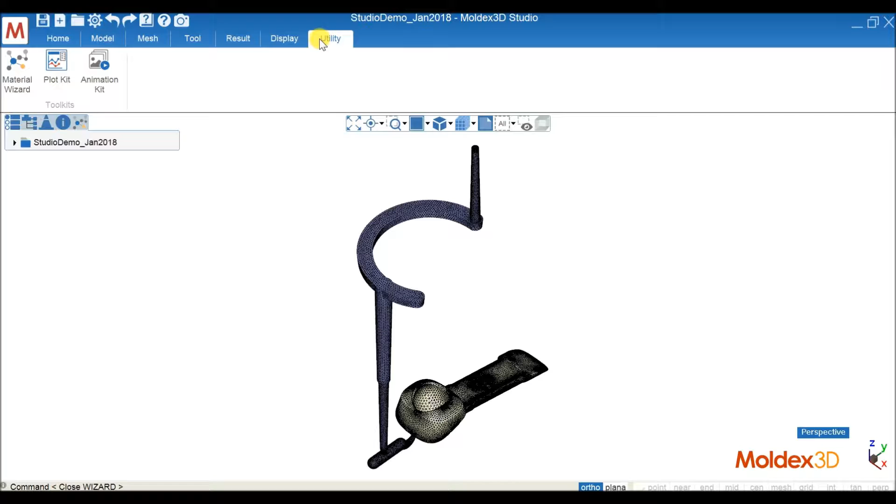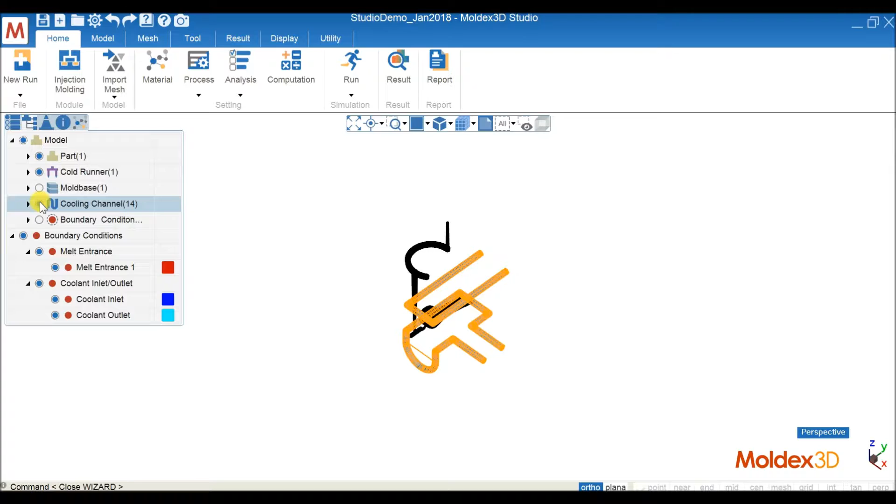So basically on the top, that's the ribbon menu, and on this side we have a tree-style structure. This is the project tree, and here we have a model tree. As you can see, that is very convenient for users to show or hide certain objects - for example, if I want to show the mold base, the cooling channel, or hide it, it's very easy to control in this model tree.

And then we also have the defect tree, so we can see the surface mesh defects or solid mesh defects remain for the mesh. Besides the defect tree, we also have a run information list.

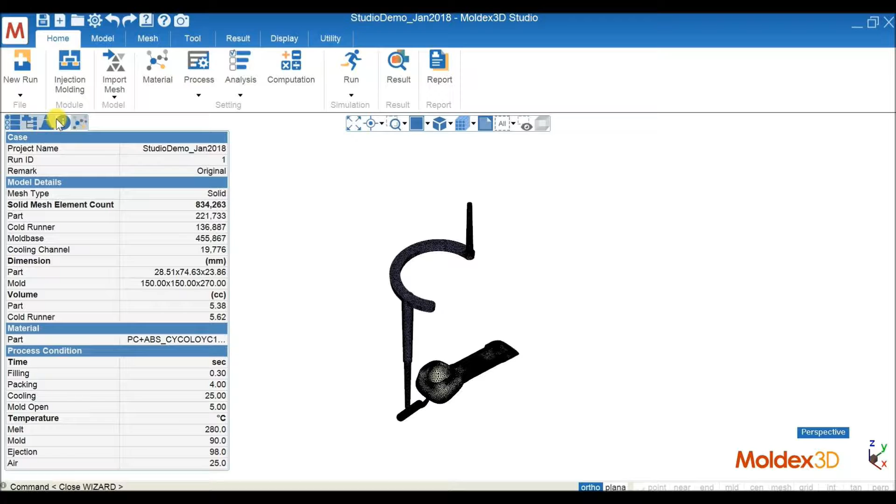This is new in Studio - we have the run information list, so users can check again the model details, the material, or the process condition. And the last in the model tree, we have the geometry and also the material which belongs to it.

So yeah, this is the interface for this R16 Studio. And for the operation, we also have new tools here.

As you can see, we have some tools like edit remarks, so in case you want to give a certain name for a certain run - for example here we have original, revision 1, and revision 2, something like that - that belongs to edit remark.

We also have export runs, so for example, in case you want to export run 1 to a new project, you can freely do that, and you can give a specific name for that one too. So for edit remark, export is very convenient.

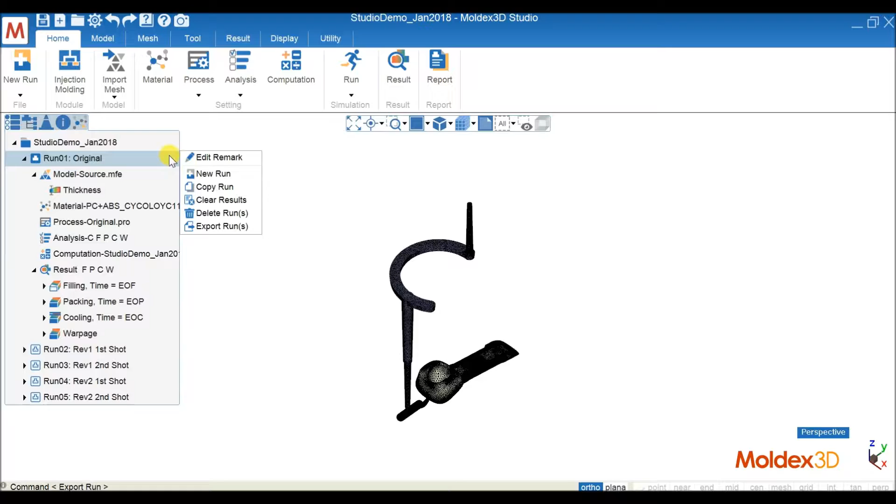Inside we also have copy run, or clear results, or also delete runs. For copy run, for example, we can copy input data only, or maybe full run data in case you already have the results, and also maybe you can customize which results you want to copy.

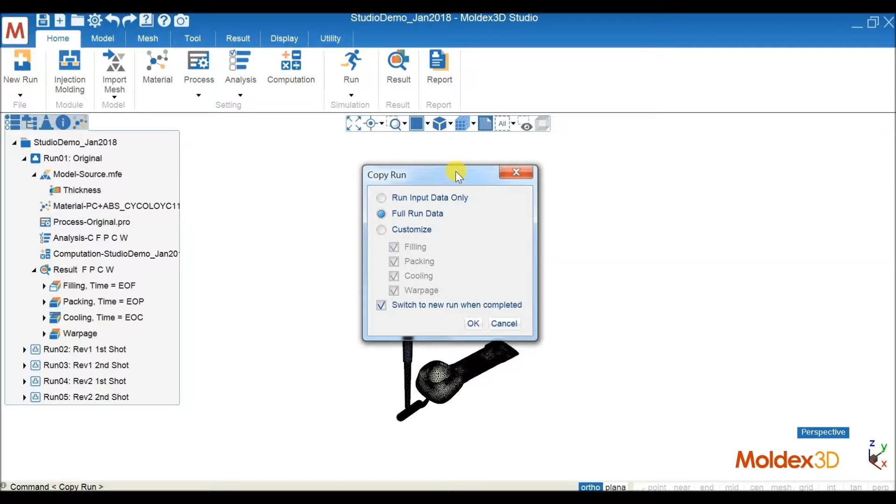This gives benefits for users in case they want to copy several runs but only change certain inputs, while the rest are kept the same - convenient for users to do the operation. So input data, full run data, customize - users can pick anything they want.

The next section is about MCM analysis. We know that in regular injection molding, one of the common cases is about MCM, multi-component molding, so we have a part or part insert, something like that.

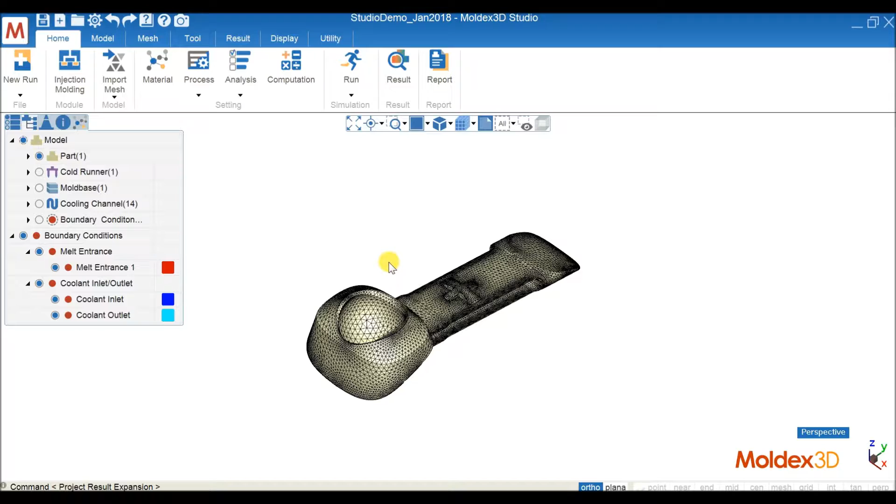Like I introduced before, we have the problem about the ball socket - we have a sink mark because of its thickness. In the studio, we can also display the thickness distribution like this, and as you can see, most of the thickest region will be on the ball socket, which will induce the sink mark problem.

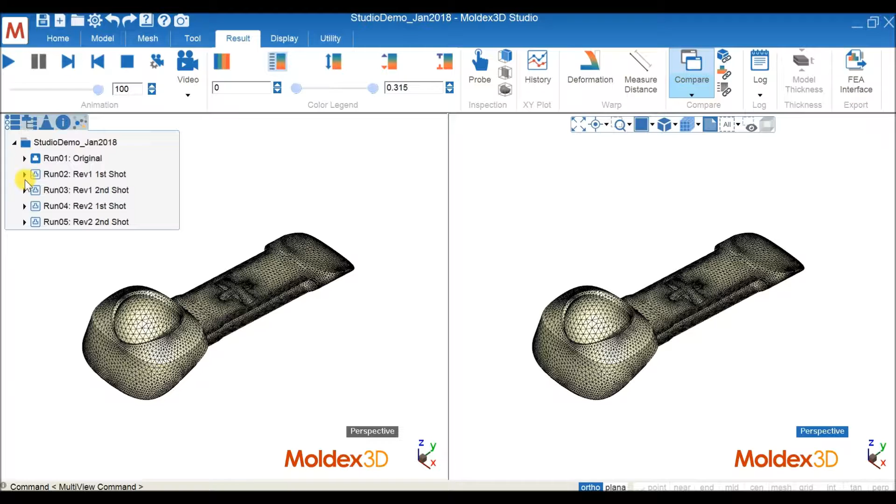So that's why we will try to do a 2K injection molding for this case. And I would like to compare using our studio interface, side by side on the left and right. This is also a special feature in the studio that you can compare two different runs side by side, in one platform. So users will find it very convenient to control and show everything in one platform.

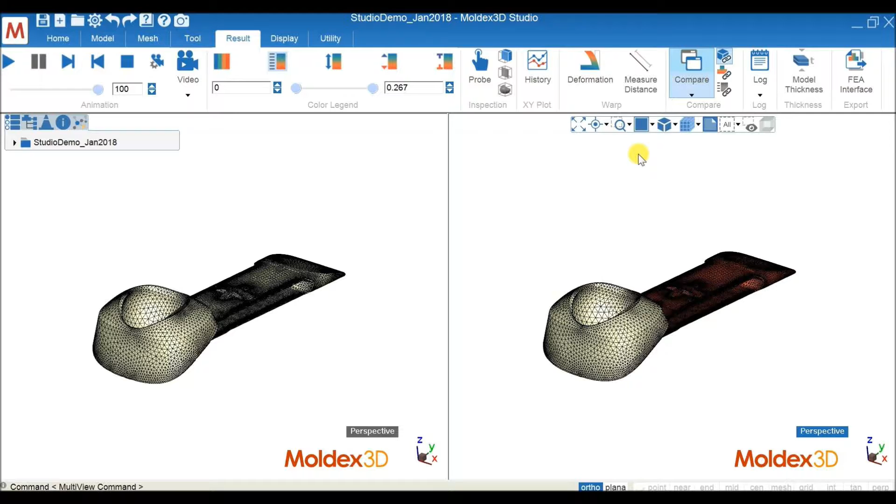So here on the left and right side, you can see that is a 2K injection molding. We try to have the first shot on the beam and the second shot on the ball socket. So our studio can now support this 2K injection molding, or MCM technology.

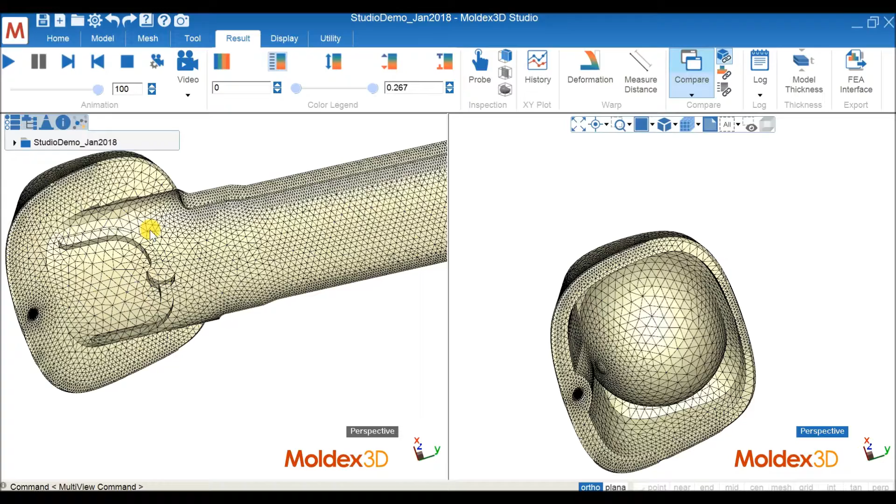I also would like to show why we need to change to the 2K injection molding, because now the thickness for the ball socket will be reduced by using this kind of technology. So this will help the designer solve their sink mark problem.

We can hide and show the part insert in the model tree. And also we can check the material. So basically users can set the material for the part and the material for the part insert very conveniently from our UI.

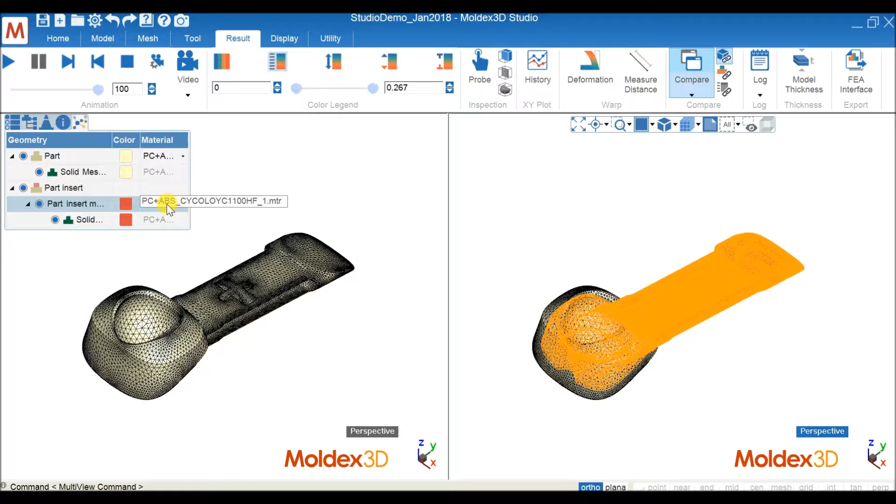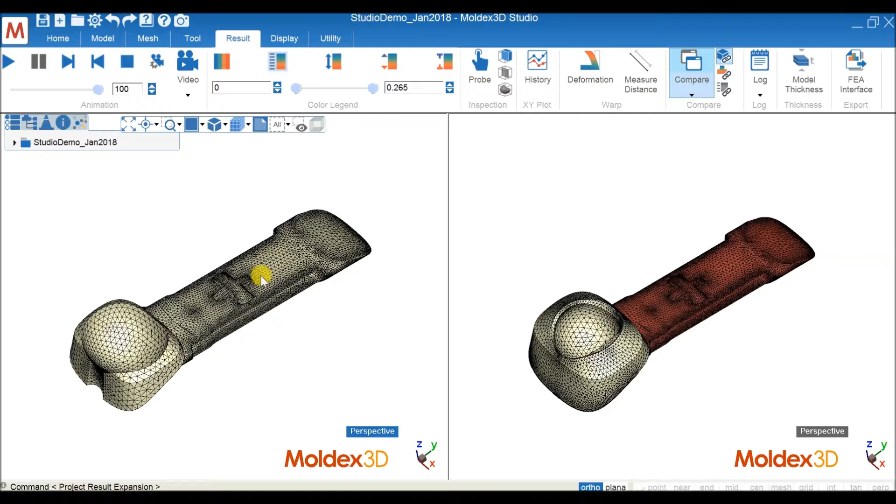On the left side, I try to show you, for example, I want to open run 2, which is the first shot for revision 1, so you can get a feeling of what this 2K injection molding looks like. On the left side, as you can see, that is the first shot, the beam. And on the right side is the second shot, the ball socket.

So this is our MCM analysis for the studio. The special setting that we usually have in our MCM analysis is in the computation parameters, where we have an MCM tab. In here, as you can see, we have what we call link with the previous shot.

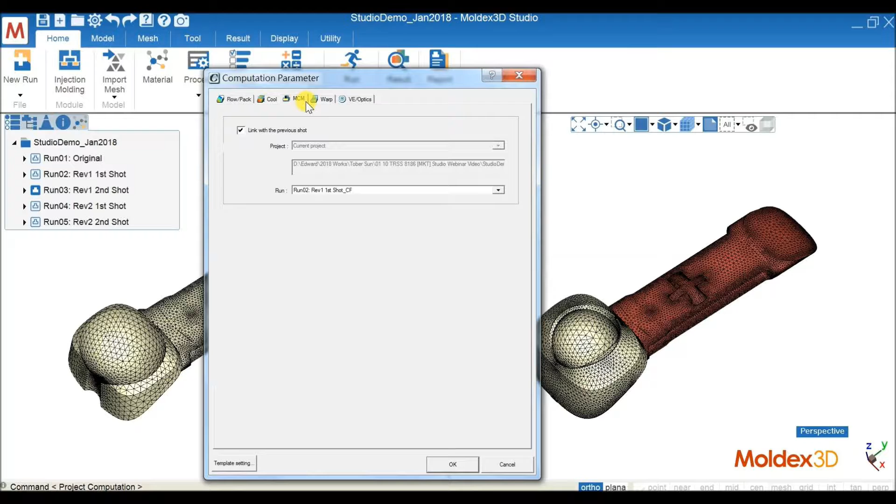This means your second shot will have a link with the first shot, so it carries the temperature result from the first shot. This will influence the result for our second shot, for example in the overmolding case.

And the last section for the demonstration video is about result inspection. So we will see several new things in R16 Studio that we can use.

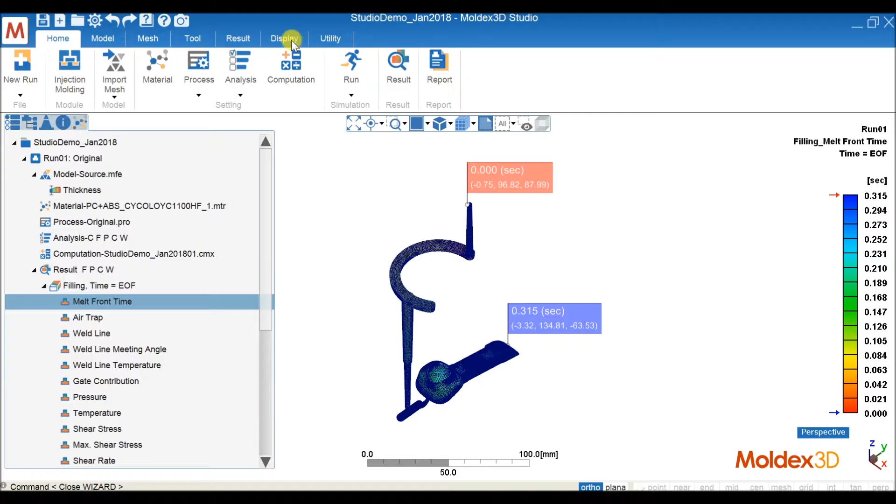The first one is display maximum and minimum. When you select a particular result, like melt front time in this UI, you can check the maximum and minimum value shown. If you turn off a run or something like that, this maximum and minimum value will automatically update itself, so it's very convenient for users. In case they want to hide it, users can also hide it in the display setting. So that's our new feature, display maximum and minimum.

The next thing is, for example with temperature, if we want to check the maximum, the red color, the highest temperature, we can use the clip and also see the distribution, what the temperature distribution is for this case.

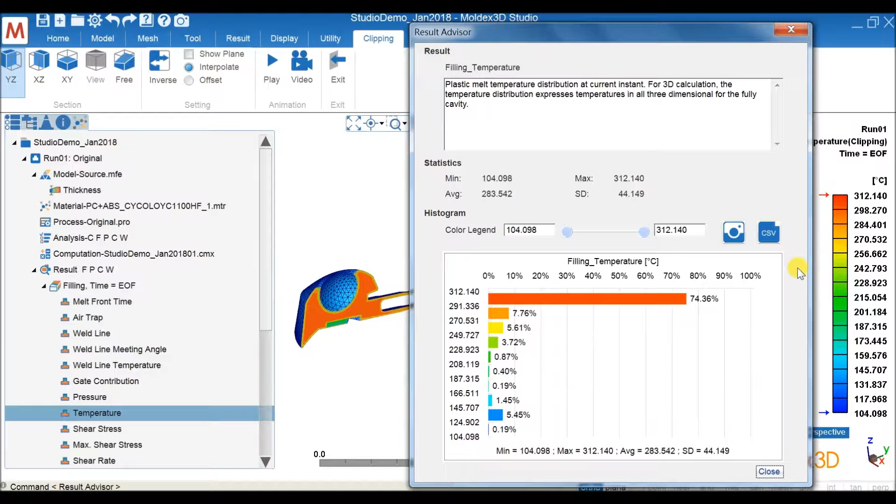We have a new feature now in R16, we call it result advisor. Users can double click on the result and it will show the statistic or distribution of the temperature. It's very convenient to use the studio to check or investigate the result.

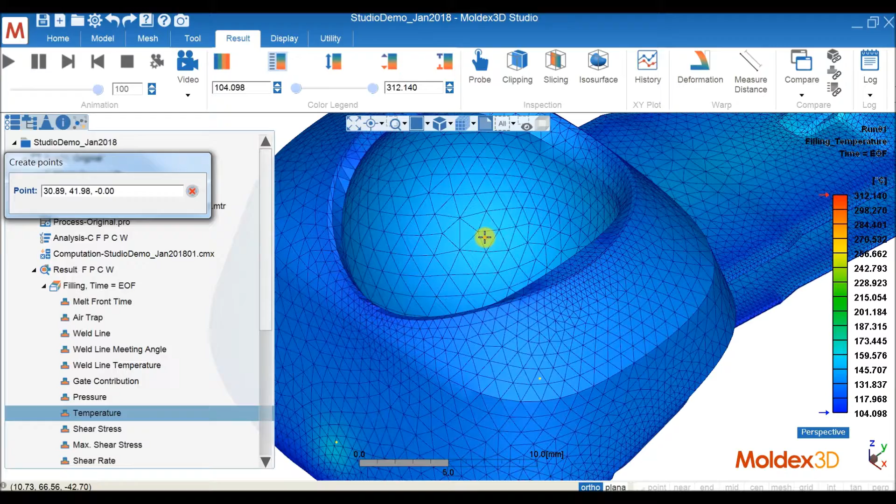The third new thing in result inspection is a tool we call probe. If you notice, in the project we have what we call the measure node, but in R16 Studio we have probe. As you can see, we can place the probe anywhere—it doesn't necessarily need to be at the mesh point or mesh node, it can be outside of it. Even when I pick it outside the mesh node, we can still check the result.

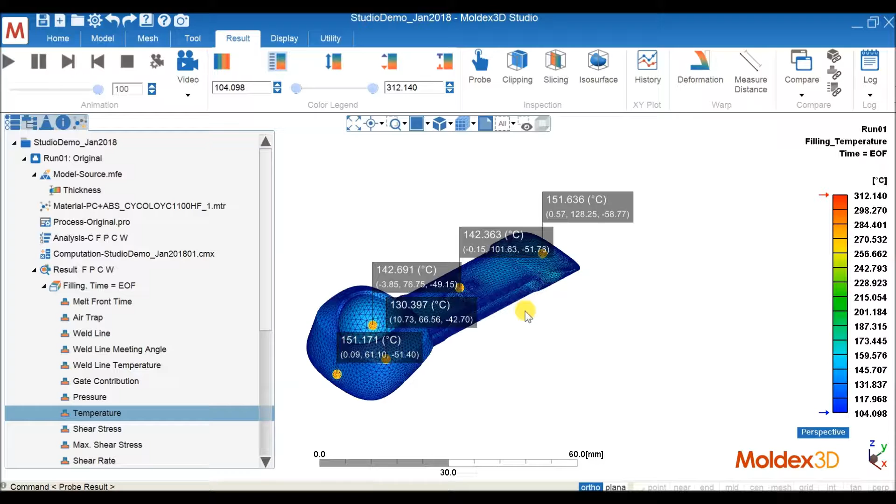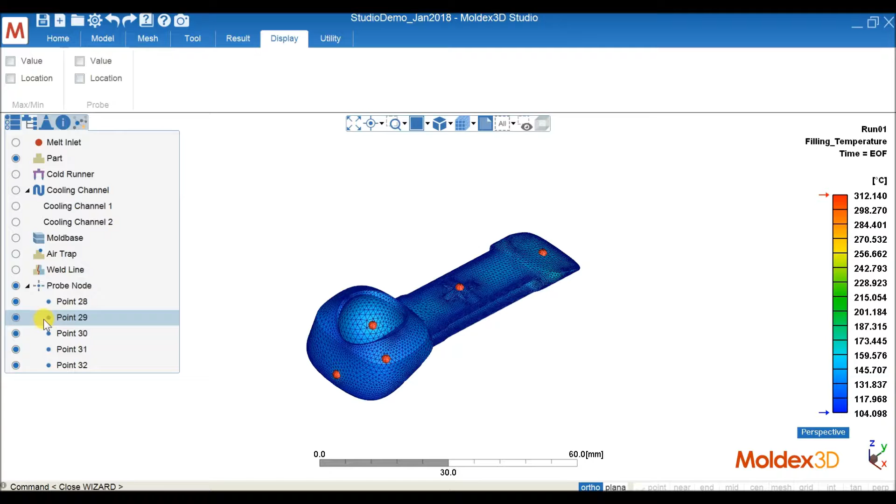So our probe can do intermediate value calculation, meaning it will calculate at the intermediate mesh nodes. From here we can double check that the probe is not on the mesh node, but it can still show you the result. In case users want to hide it, you can set it in the display setting. And also we can check it in the model tree in case the user wants to hide the probe or show it.

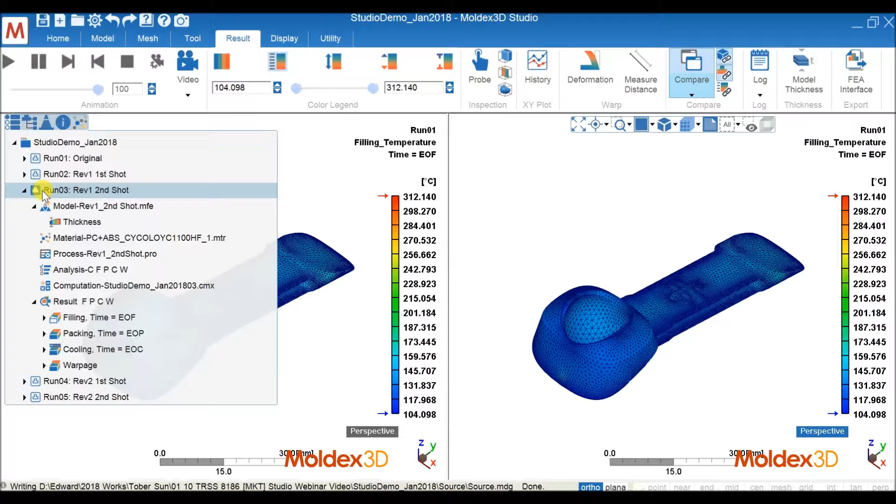Okay, so that's the new things. Now I also want to compare again the original design, run 1, and on the right side I'll show the revised design, run 3, the second shot with 2K injection molding for this case. We can use the compare tool at the top.

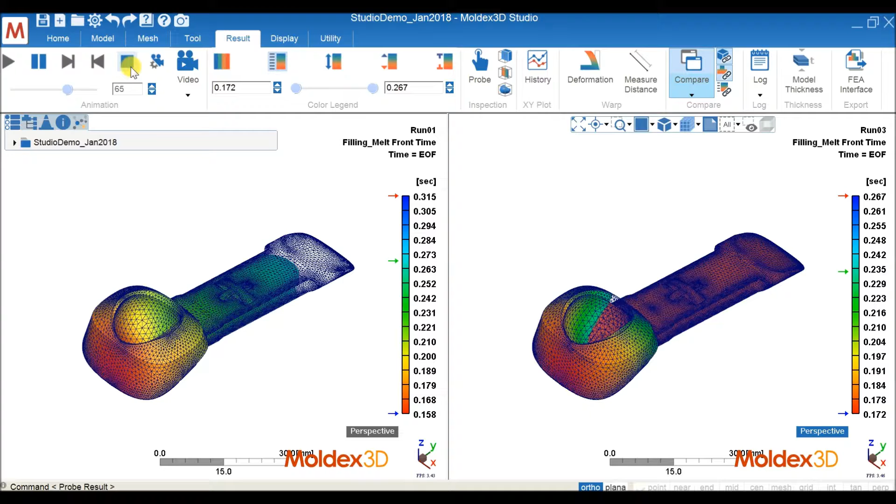You see the tool, and then we can compare. On the left is run 1, and on the right is run 3. We can also sync the angle and sync the result, so now it shows the same result, melt front time, for both left and right side. For the original design and the second design, we can see the melt front behavior, and they have different melt front behavior because they have different objects or parts.

Next, I also want to investigate the volumetric shrinkage. Basically we just select the volumetric shrinkage for one run, and it will automatically change the other run to show the volumetric shrinkage too, because we have the sync result tool. Then I click sync range, which means the range on the left side will be the same as the range on the right side, which really helps users judge which design has higher shrinkage.

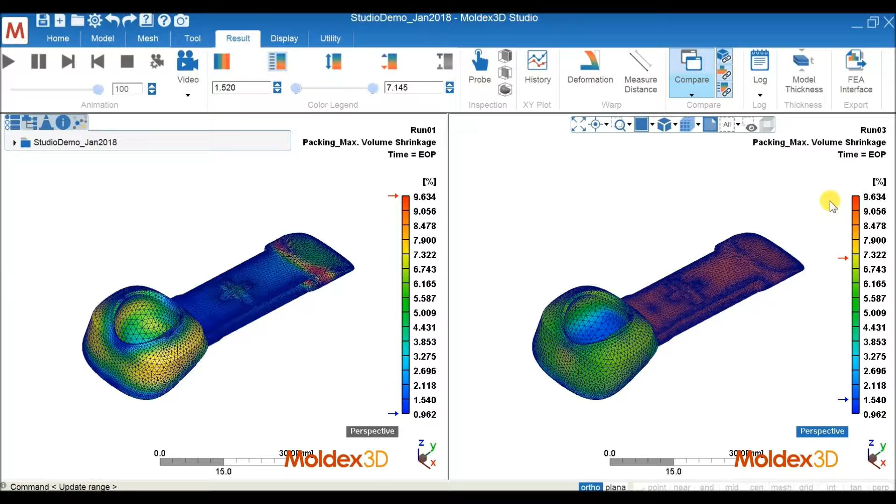For example, on this side we can see that run 1, the original design without 2K injection molding, has higher shrinkage. So we can say the revised design 1 really can solve or improve the sink mark problem from the original design. Now I'll open the sink mark displacement. As you can see, the sink mark on run 1 is higher based on the color distribution and the value.

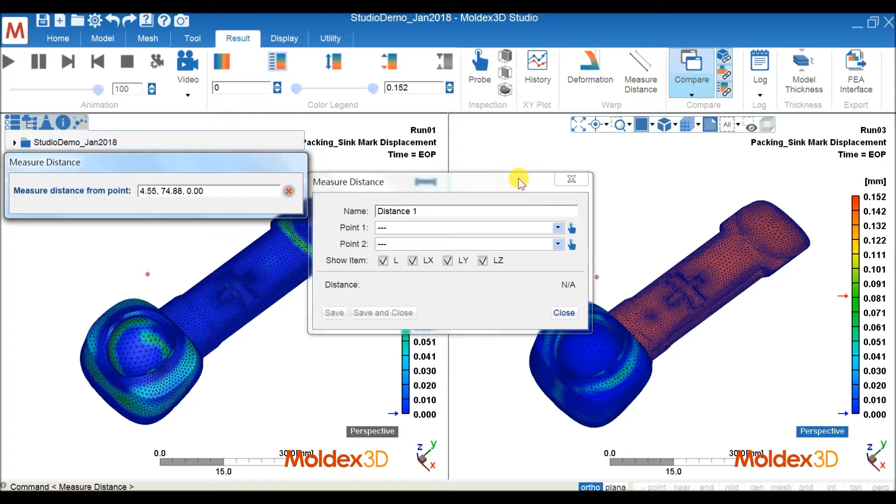So that's how we can use Moldex3D Studio to do comparisons using sync angle, sync result, and sync range. This is the fourth new function in Studio.

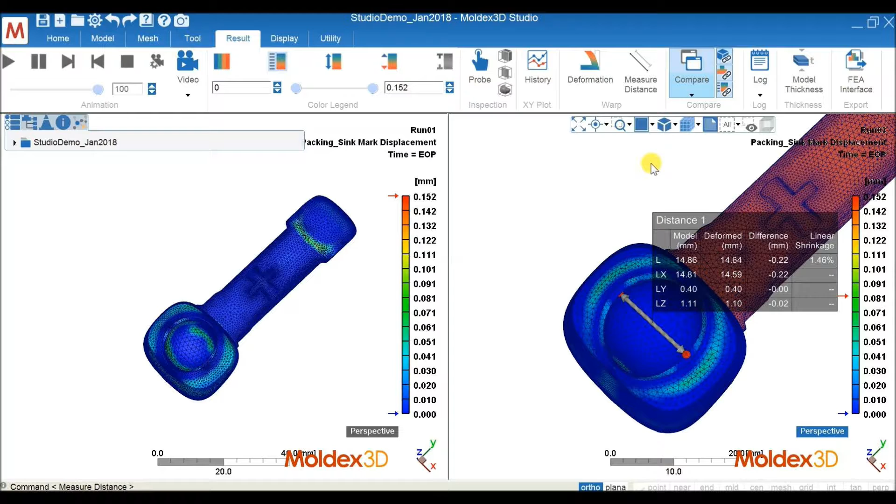We call it measure distance. Basically, users just need to point to 2 points, anywhere the user will pick or select, and it will help do the measurement. The measurement is for 4 things: model size, the size after deformation and the difference, and the linear shrinkage of those 2 points. The Studio will plot this table and help users know the linear shrinkage on those 2 points.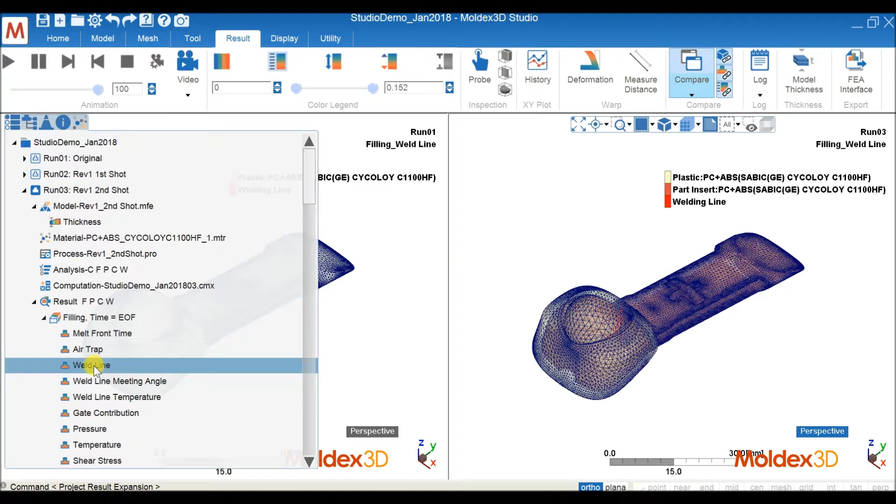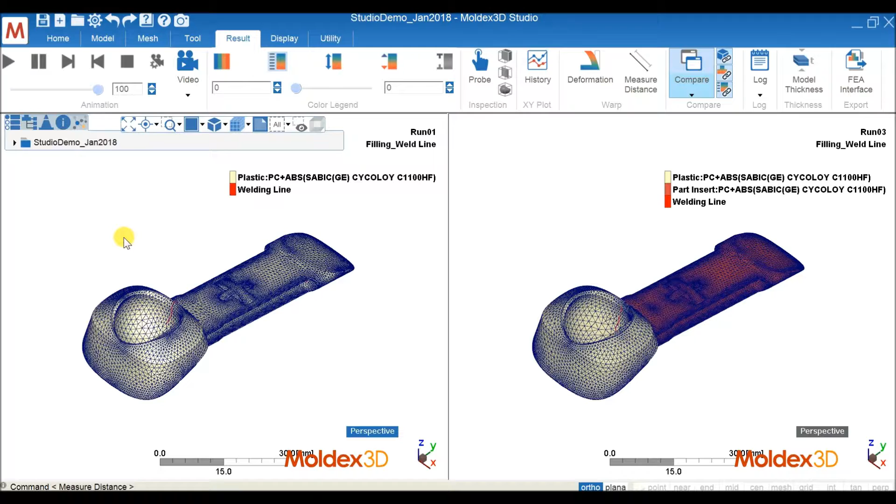Okay, and next, since we already know the revised design gives improvement in the sink mark, now we have another concern about the weld line, the cosmetic surface. From here we can see that our revised design still has the weld line problem on the socket ball. That's why we need to do a revised design 2, to try to also improve or eliminate this weld line.

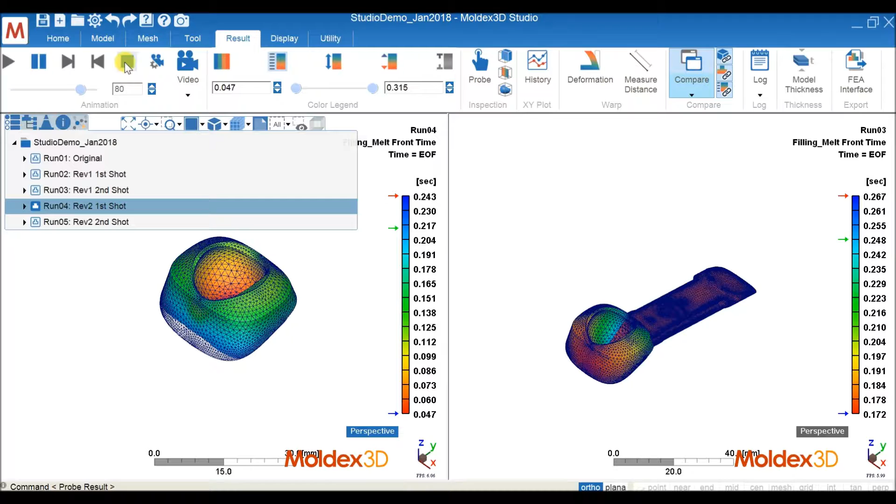In this display, I show revision design 2 on the left side. Basically we changed the gate, which also changes the melt front behavior, so we'll take a look soon. Here on the left side, you can see the melt front behavior goes from the bottom to the top of the socket uniformly, which will eliminate the weld line.

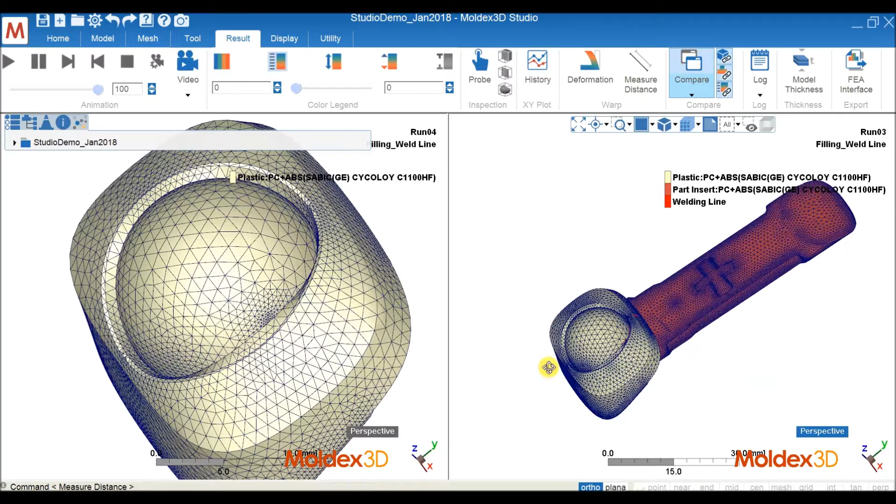We can double check and confirm this with our weld line result. As you can see, on the left side we don't have any weld line on the socket ball, but on the right side, which is revised design 1, we still have that problem. So it's very easy for users to compare and know the improvement from different revision designs.

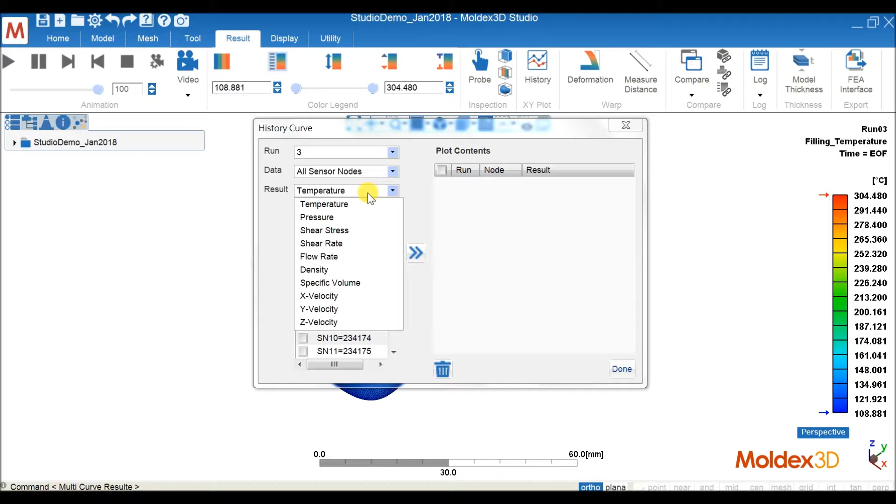Okay, and this is the last new feature I'll demonstrate in the video. We call it the history curve result. Here I compare run 3, the second shot of revised design 1, and run 5, revised design 2. I try to plot the sensor node result, the temperature result for the sensor node.

Basically, this is new in the Studio - in the project before, we didn't have the ability to compare sensor node results from 2 different runs. But in the Studio, we can do that. This is a special feature only in the Studio, and it will be very convenient for users to understand the sensor node result - for example, how the temperature will change using revised design 1 and revised design 2 at a certain sensor node location.

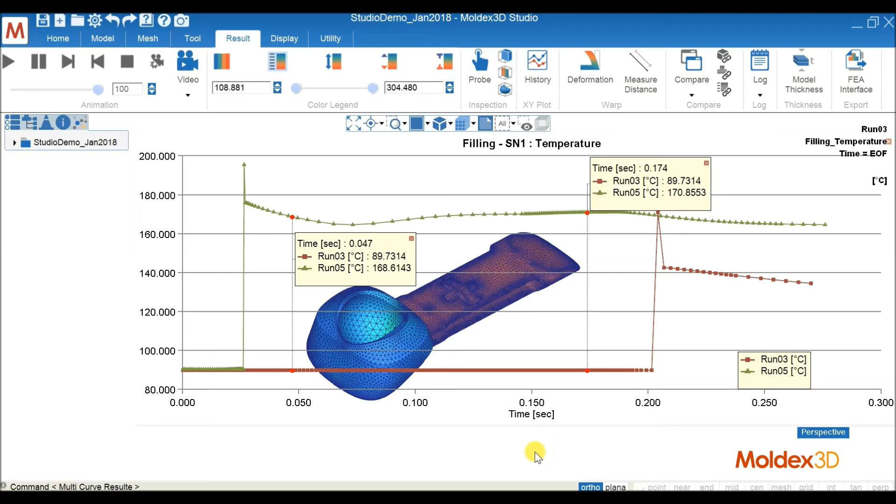So yeah, that's all for the demonstration.